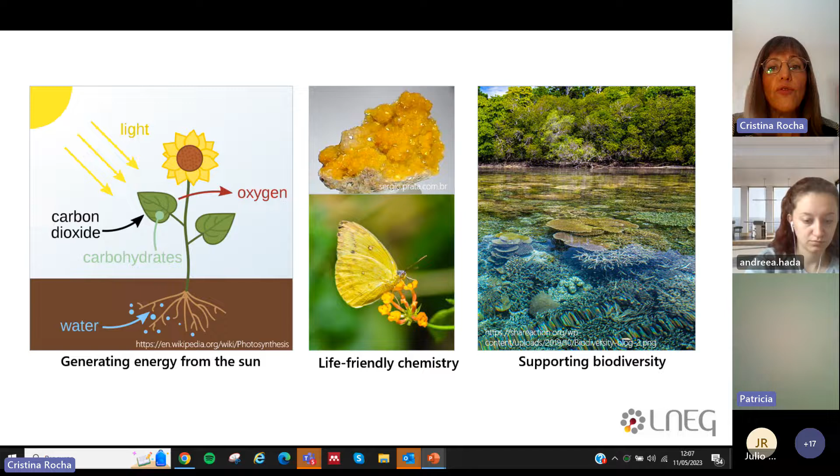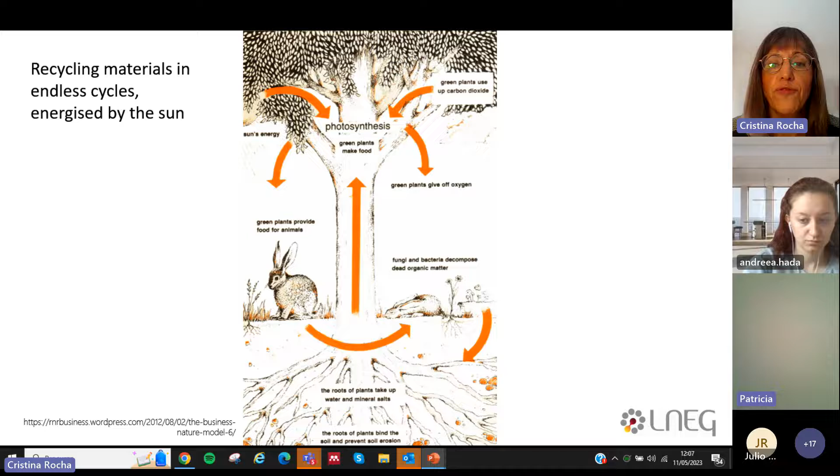Like in the natural world, where an organism's waste cycles through an ecosystem to provide nourishment to other living things, cradle-to-cradle materials, a subcategory of circular economy, are meant to circulate in closed loops, providing nutrients. This can happen in the biological cycle with renewable, biocompatible materials, but we can also try to imitate this model in the technical cycle for non-renewable products and materials, ideally circulating ad eternum in closed loops.

The circular economy offers principles for production and consumption radically different from the take, make, use, discard regime that dominates today - the linear economy, based on the false assumption that natural resources are available, abundant, cheap, easy to find, and easy to dispose of. We know that's not true, and this has caused very serious problems in terms of resource availability and pollution.

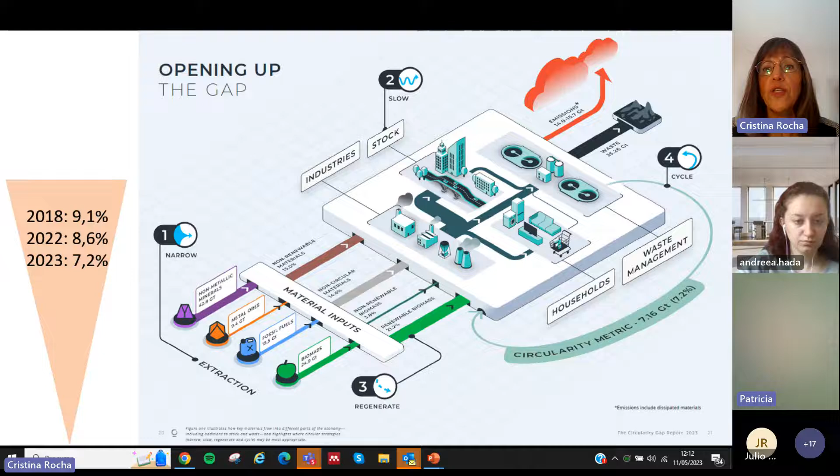Cristina, you turned your sound off just now. Okay, is it okay now? It's back. Yeah. Okay, sorry, it was a mistake.

At European level, the rate of circularity is not very high either - it's about 12%. I think the Netherlands is leading this metric with a 30% circularity rate, but there is still a lot being wasted.

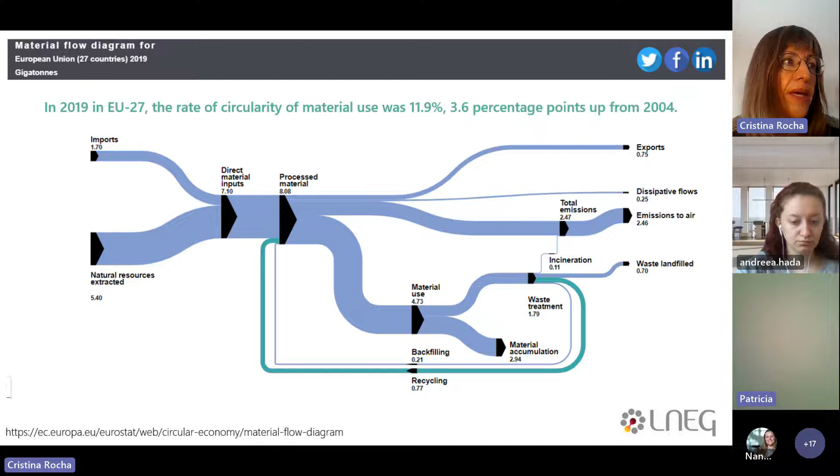Due to this kind of model of production and consumption, the Earth Overshoot Day was in 2022 on the 28th of July, which means that by that date we have already used all the biological resources that the Earth can renew during the entire year. Here we have the figures for different countries - Portugal is here, Spain is here, Denmark is here, even earlier, and Romania is here, doing a little bit better. But this is a problem, because from the Earth Overshoot Day onwards until the end of the year, we are in ecological deficit.

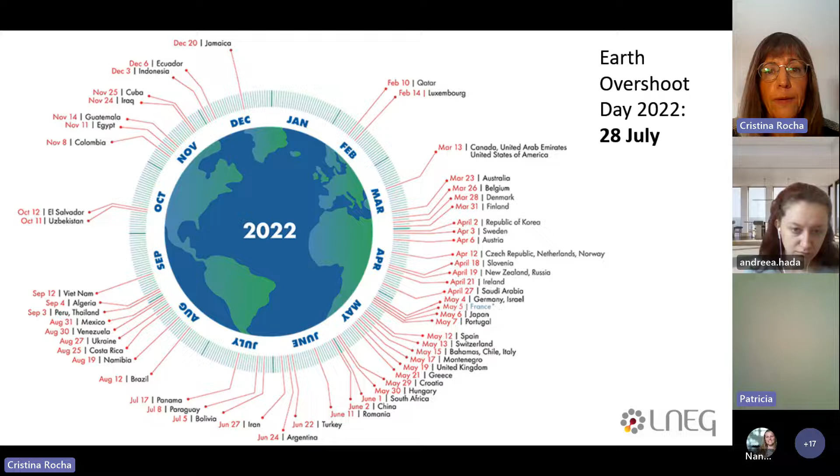And this has implications not only on the material side, but also on the energy and emissions side. Here we see the materials related and the operational energy use emissions by sector.

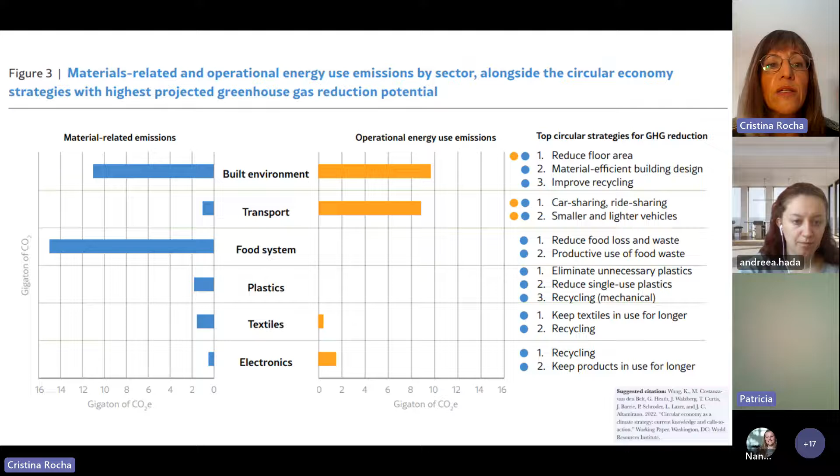And if we take a look at the built environment, we see that the emissions related to the operational energy use are important, but the material-related emissions, meaning those emissions that are related to the production, transportation, and use of materials used in the built environment, are very important as well. Of course, here in transport, it's more on the energy side. Food system is completely on the material side. But this is to say that when we address a much more efficient and effective material use, we are also having strong implications in greenhouse gas emissions and fighting this climate emergency.

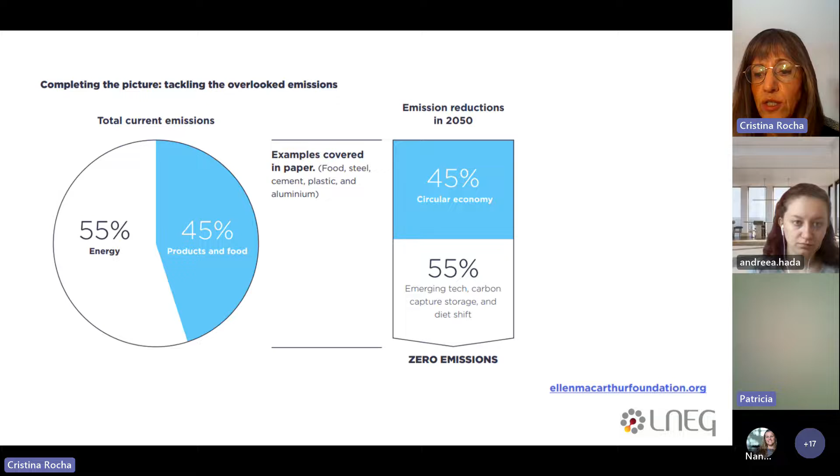And according to this study by the Ellen MacArthur Foundation, which has been so active in the field of circular economy, with the energy transition, we can tackle 55% of emissions, but then we still have 45% to tackle where the circular economy can play a very important role. If you think, for instance, in the difference of carbon emissions of virgin aluminum compared to recycled aluminum, the difference is huge. So we need this strategy also for climate change.

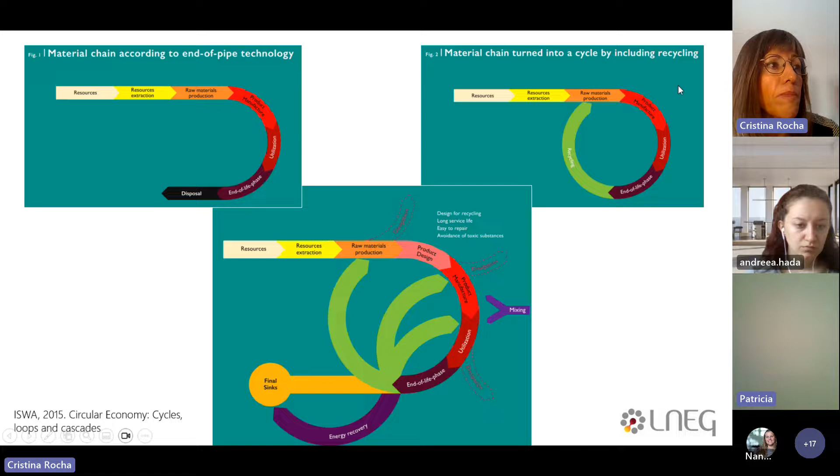Currently, this is our model. This is our ideal, but we know that this is not possible just by recycling. And actually, the circular economy is not only about closing cycles, but it's a combination of strategies where we close, slow, and narrow resources. So in closing resource loops, the keyword is use again. In slowing resource uses, the keyword is use longer. In narrowing, the keyword is use less. And then there is another important trend, which is regenerating loops, make clean, use biodegradable materials, renewable materials, etc.

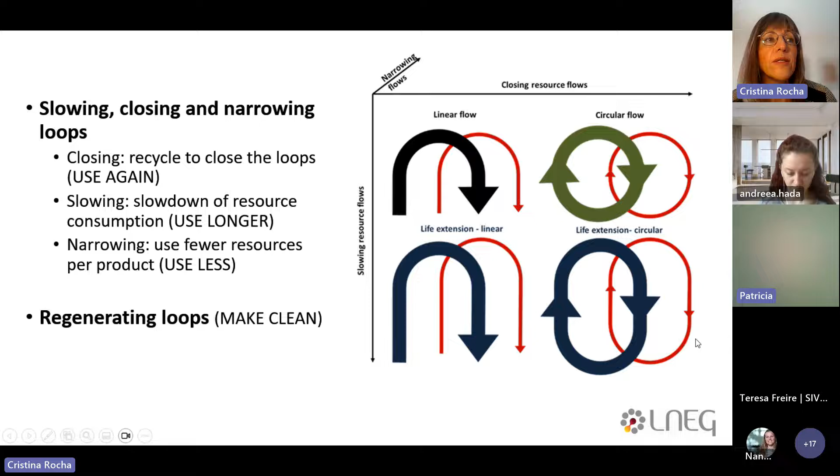Well, this graph here shows the transition we need to make according to these three first strategies: closing, slowing, and narrowing. So basically, what we have been doing with eco-efficiency is to transition from this fat, let's say, resource use linear flow to this more efficient, doing more with less, etc. So we need to close, but we need also to use products for much longer time than we've been doing so far. And what is the role of design in all of this?

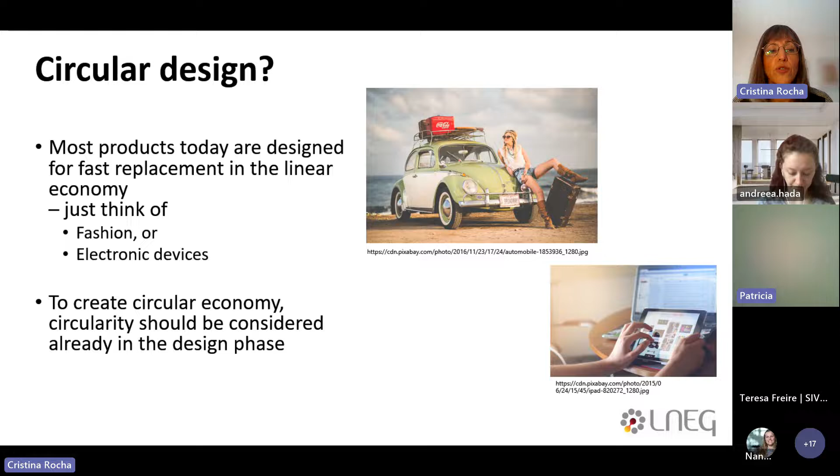The fact is that most products today are designed for fast replacement. And examples are fashion or electronic devices. And to create a circular economy, circularity and this kind of strategies should be considered already in the design phase, because circular design provides the potential of durability, repairability, maintenance, reuse, refurbishment, remanufacturing, recycling of products. And this is very important because most design decisions are not reversible. It's like unscrambled eggs. You can't do that. So we have to start thinking about this already at the design stage.

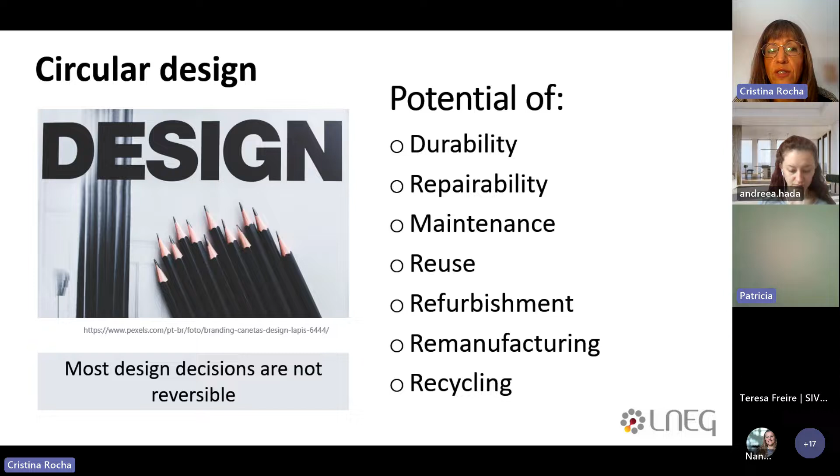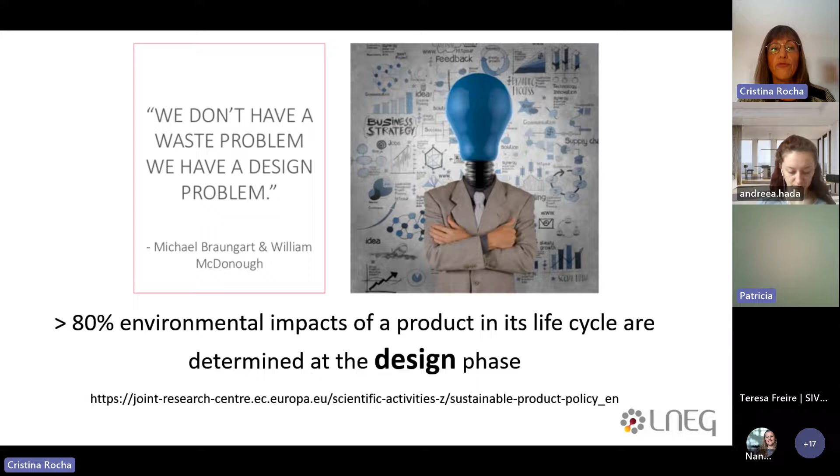And this is why perhaps Michael Braungart and William McDonough, the parents of the Cradle to Cradle initiative, say that we don't have a waste problem. We have a design problem. And more than 80% of environmental impacts of a product in its life cycle are determined at the design phase. So this is really, really important, and this is my focus in this presentation.

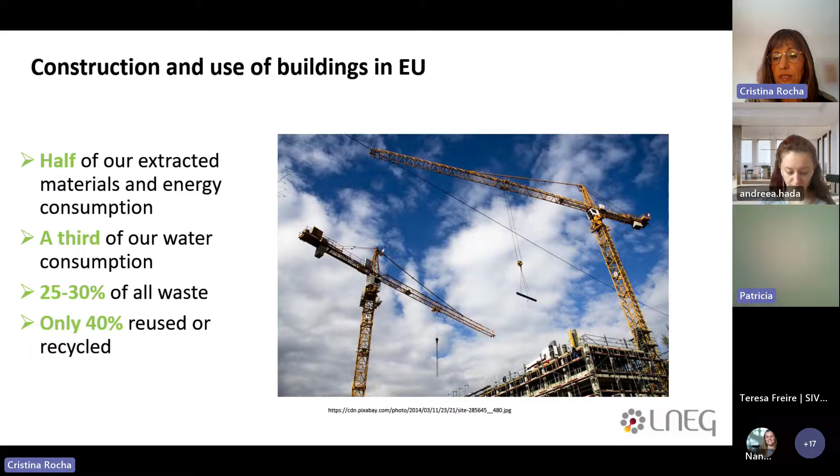Now, talking specifically about construction and use of buildings in the EU, there are some important figures. Half of our extracted materials and energy consumption are related to this sector. A third of water consumption, 25 to 30% of waste, and only 40% is reused or recycled. And a building is a very complex entity. It has many components with a very long expected lifetime, which means that the materials that are used in buildings as well as in infrastructures, they stay there in stock for a long time.

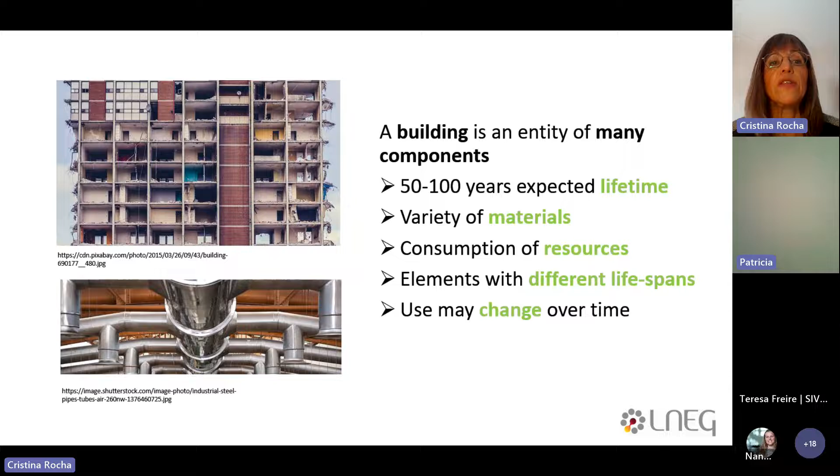Buildings use a high variety of materials and represent high consumption of resources and have elements with different lifespans. Another trend is that buildings need to be more flexible because more and more their use changes over time. So already at the project phase for a building, circularity considerations need to be taken.

And a very good example of this is the Circle House project in Denmark, which is totally designed for the circular economy. It's social housing. It consists of 60 housing units. I think they are going to be inaugurated this year. Perhaps our Danish friends can update us on this.

And this is to demonstrate how building systems can be disassembled and reassembled for use in other buildings, keeping their economic and aesthetic value. These buildings have also been designed for easy access and maintenance in order to extend the lifetime of the building, and they are modular, so they are flexible. They were designed for disassembly in order to avoid destructive demolition, which is very, very important in the building sector and in the habitat sector.

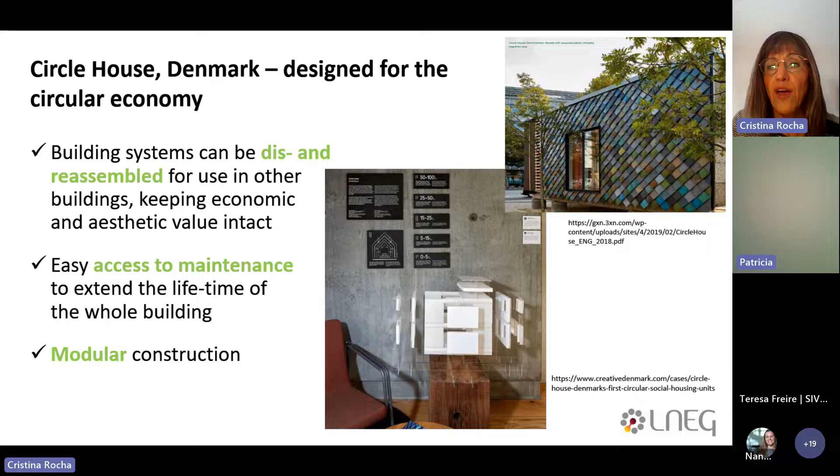And one tool that is related to this kind of thinking, where we have been working, is materials passports for buildings. So it's a digital document which has a compilation and display of materials that are included in a product or construction. It's a series of data that describes the characteristics of materials in products. And it contributes to a circular economy because this kind of tool gives those materials a value for recovery, recycling, and reuse of materials and components.

And this information is the passport of the building, but can also give an indication of, let's say, a bank of materials that will be available within a certain lifespan. And I will not go in detail in this tool, but I wanted to mention here you have the link where you can access this tool. It is available in Portuguese and in English with an instructions manual.

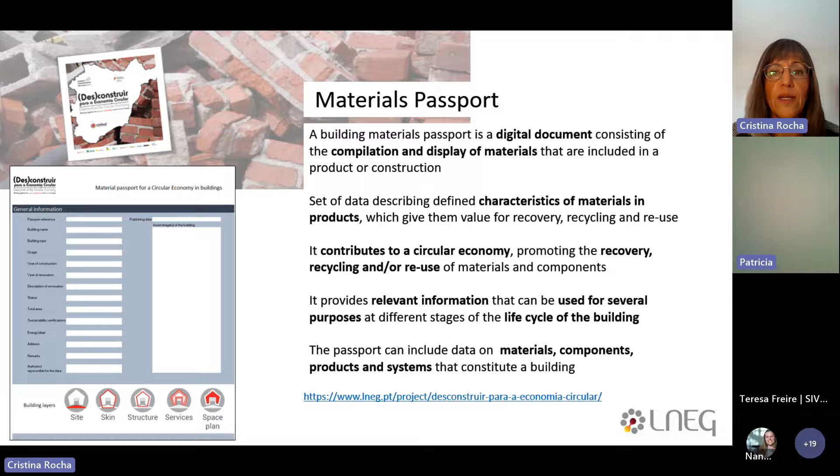But basically, it is organized according to these different layers: the site, the skin, the structure, the services, and the space plan, like we've seen in the concept of the Circle House project in Denmark, because they have different lifespans. And for each of these layers, we have a core section where users can register the products and respective materials and their quantification and some other information.

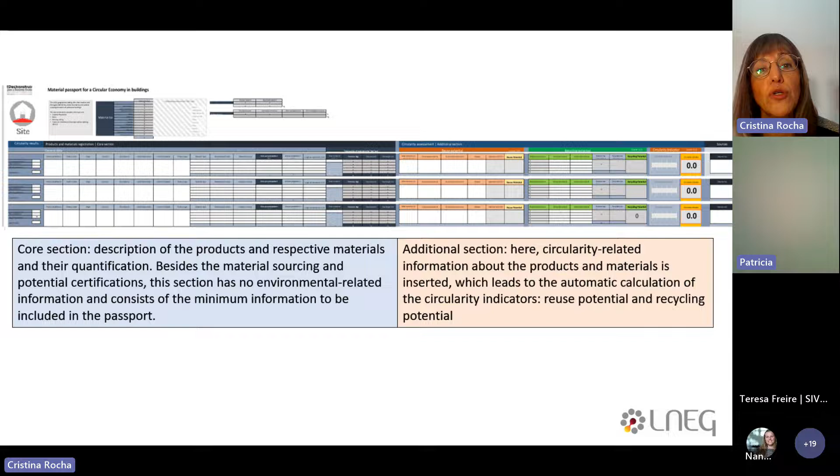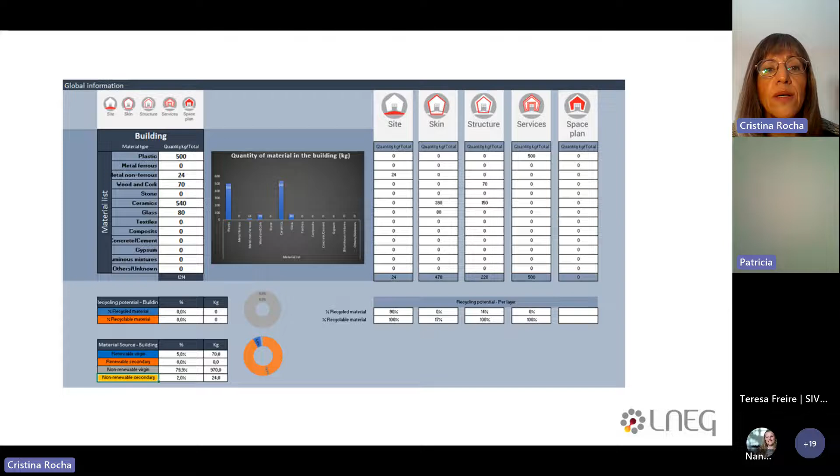And then an additional section where circularity related information about products and materials is inserted. And this leads to an automatic calculation of circularity indicators, which are basically the reuse potential and the recycling potential. And this is an automatically produced overview of the materials that are in a building and the amounts, recyclability, etc.

So we overuse materials in the production stage. During the productive life, many products have a very low utilization. For instance, 8% for cars. The rest of the time, cars are idle. We use them for a shorter period than they would technically allow. And after the first cycle, we recapture only 5% of raw material value. So we need to do better than this.

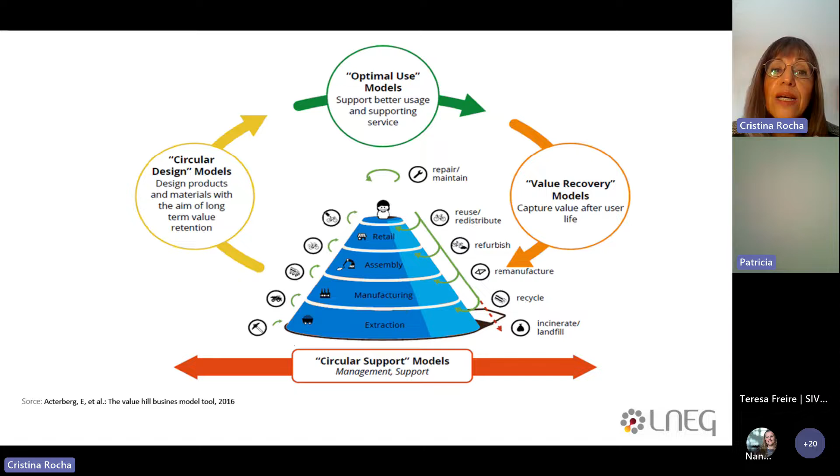So reuse in general terms is better than to refurbish, because if I reuse a product with no or absolute minimal interference, we don't need to use money and any resources to reuse the product and make business out of it. Then a second stage would be to do some refurbishment, and this is then involving the distribution level, and the product can be reused still intact with a little bit of work.

The next stage would be to remanufacture, and here we are using the components of the product, not the product as a whole. So we go back to manufacturing and can reuse the components. And if none of this is possible, then we act at the material level with recycling. But there is this hierarchy: the closer the loops, the better.

To give you an example from an economic point of view, a smartphone, let's say that new it costs 600 euros, it can be sold second-hand if it is in good condition for 300 euros. But if we want to recycle the materials that are in this mobile phone, we make 72 cents. So there is, of course, an economic incentive to these kind of strategies, and also an ecological incentive.

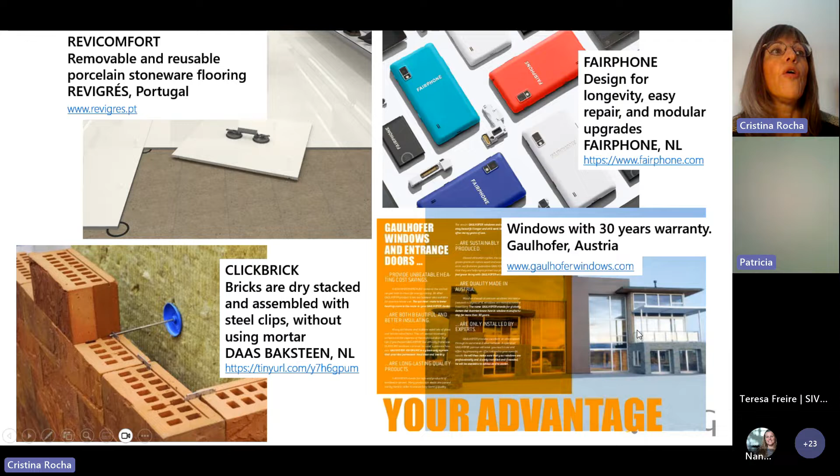They contract the service of lighting, of providing good quality lighting in places like Schiphol Airport, Washington Underground, and several companies are using this. So again, this is dissociating revenues from more production. So the profitability does not necessarily mean more production.

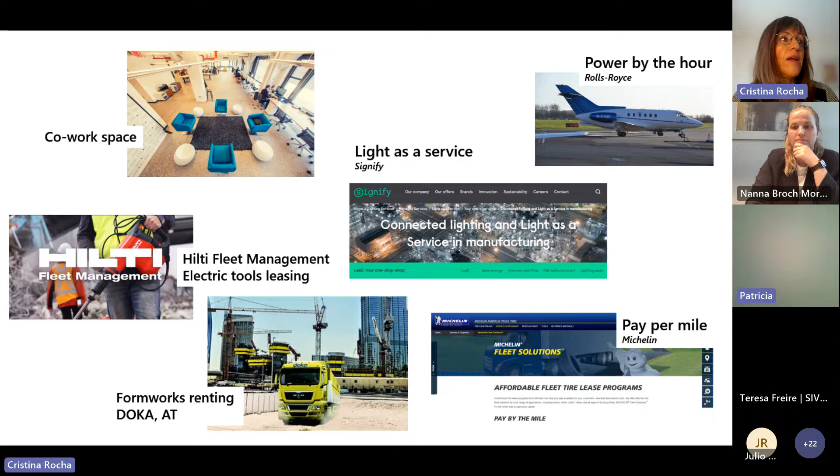The trend is to make more and more with the same product. And this transition from products to offering services brings this opportunity to dissociate revenues from resource consumption and pollution. We have another example here, which is the Rolls-Royce engines used in aircraft, Power by the Hour, the Pay per Mile by Michelin for professional fleets, etc. So these are on the market, so they make business sense and they are offering interesting sustainability opportunities.

A couple of more minutes, and then we have time for questions. I'm almost finishing. Great. Thank you, Nanna.

Yeah, thank you. Just to tell you where you can find tools, examples, knowledge, and inspiration. There is this project that we coordinated some years ago where there is a knowledge hub. I invite you to explore it. Within this project, we developed several tools, 7 to be more precise, and 2 of them are particularly relevant for this presentation today, the CE Strategist and the CE Designer. They are web-based tools, you can use them online.

And the CE Strategist allows companies to identify circular business opportunities based on the very well-known Business Model Canvas. So I recommend you go there and take a look if you are interested. And the CE Designer is, again, a web-based tool consisting of checklists for prioritization, evaluation, and idea generation for products and services which are more circular, according to this list of strategies.

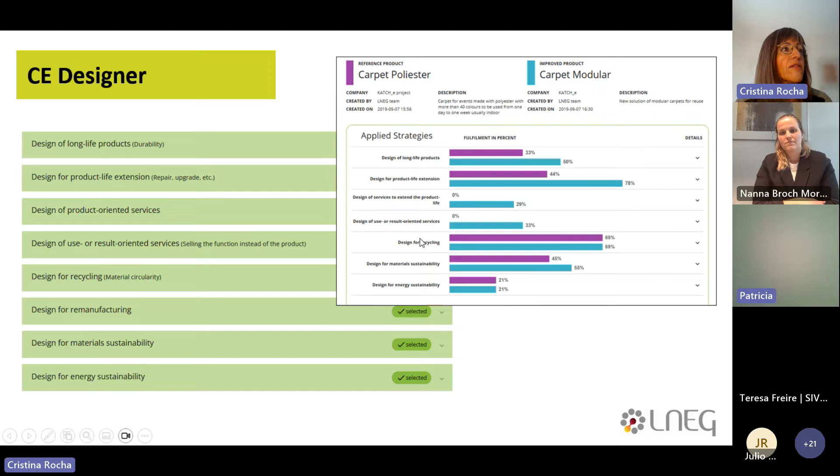And the result is a comparison of how the baseline product or solution performs in comparison to the new solution according to the different strategies that can range from long life products to design for recycling, etc. So these are simple to use tools.